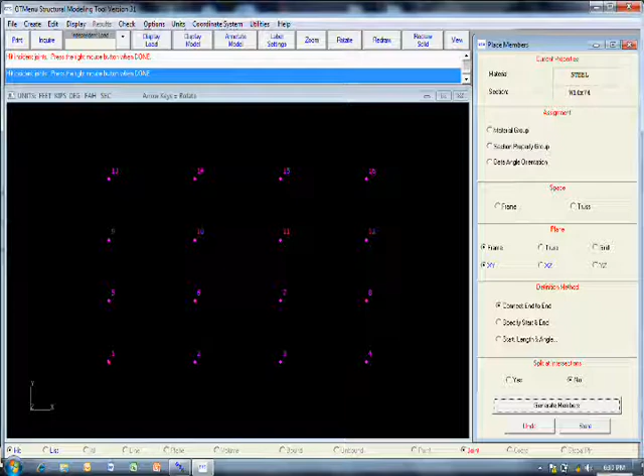All right, start off and click on Joint 1, and you'll have a line attached to your cursor. Click on Joint 5, then Joint 9, then Joint 13, and just go up to the line. Then after you click on 13, right click. You'll have a yellow line.

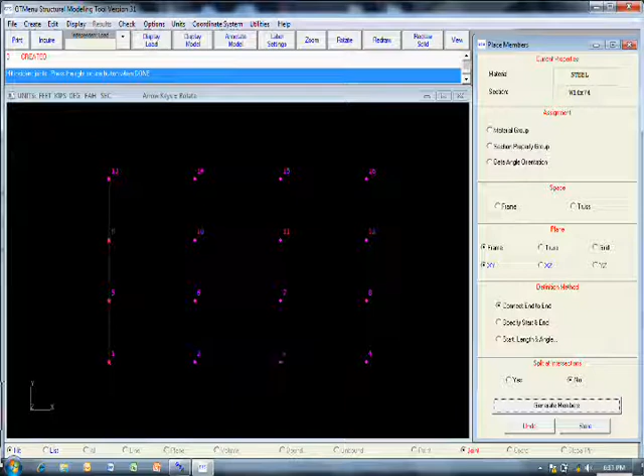Go back and hit Generate Members again, and do the same thing for 2, 6, 10, 14, right click. Same thing for 3, 7, 11, 15, right click. Then 4, 8, 12, 16, right click.

You always do columns? You can do whatever you want to. I just picked to do columns first.

So what I did is I just created 12 columns using W14 by 74s out of steel. You could put W14 by 74s out of concrete, but they don't make those, so make sure you got the right material property when you do this. Once you do that, go ahead and click on Store at the bottom right corner.

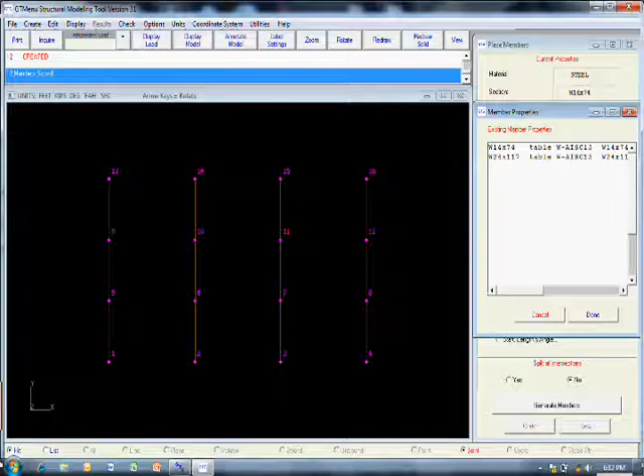All right, and then we need to place the beams. You're going to go back to the section property group up at the top right, click on the W24 by 117 and hit Done. Everything else should have stayed the same.

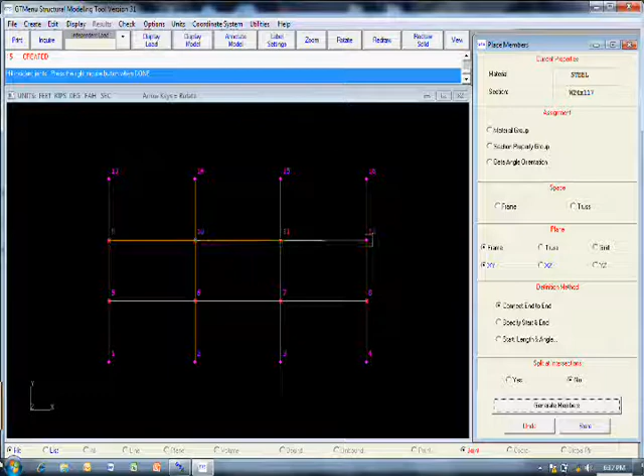You're going to generate members and start at 5. If I go too fast, tell me. Click on 5, 6, 7, 8, right click, generate members again, 9, 10, 11, 12, right click, generate members, 13, 14, 15, 16, right click, and then store.

All right, so we just created this frame in STRUDL. Now you have a maximum on your version of 50 nodes and I think 200 members, so make sure if you're ever doing a model that you don't make it too big. You get done with it and then it won't let you save it. For future reference, anybody doing senior design, I have 4 copies of the full version of STRUDL now for the department to use.

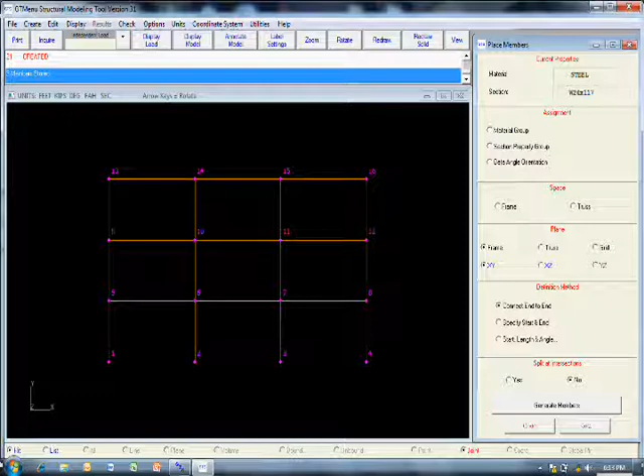All right, so now if you click on the View tab at the top, let's click on Isometric View. You get an isometric view of the frame, and click on Redraw Solid. All right, you can see the beams and everything.

Now this is a good way to make sure that you got your beams rotated in the right direction, from your columns and stuff. For example, instead of having square columns right here, we actually have wide flange sections that look like that, in this orientation.

Now, if I rotated those 90 degrees for my columns, is that going to affect how my frame behaves? Why? Because you're using the weak axis of the member to resist the moment. So when you're doing this, you want to make sure your columns are oriented correctly to be in strong axis bending in your lateral resisting frame.

Now there may be a situation though in the other direction, because we're not going to do it today, but at some place in this building, you've also got to account for wind blowing either this way or this way. So we got to put that in there too.

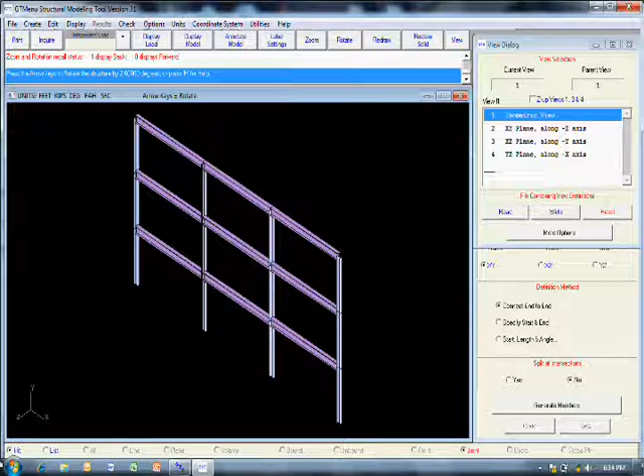But anyway, I just wanted you to see what the model looks like, and if for some reason you forget and left your units in inches, that would be a big blob of just members connected, because they would be huge with respect to the lengths. So it gives you another way to look and make sure you type everything in right. All right, so go back to XY plane here.

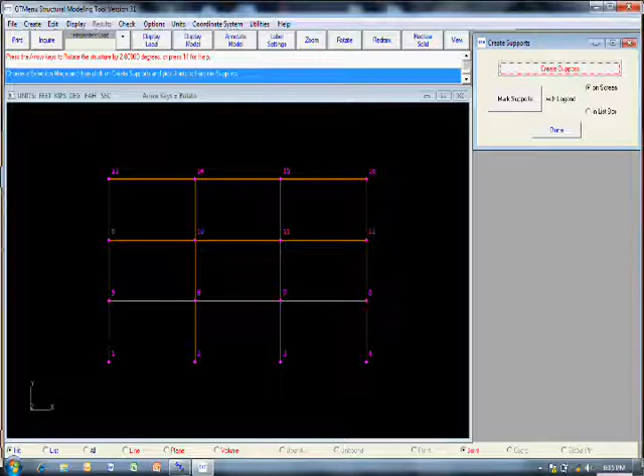All right, and this will be your frame. Now we need to add some supports to the bottom. So we're going to go to Create, and you're going to click on Support and Release, and then we're going to click on Create Supports in the top right corner, and you're going to click on joints 1, 2, 3, and 4, and then right click.

Now, the default in this program, and probably SAP or STAAD or anything else, is that when you click on them to make them a support, they're rigid in every direction. Rotation, displacement, everything. Okay, but we want to release the moment about the z-axis. So we want to allow these joints to rotate this way because it's extremely difficult to have a true fixed connection at the base of a building.

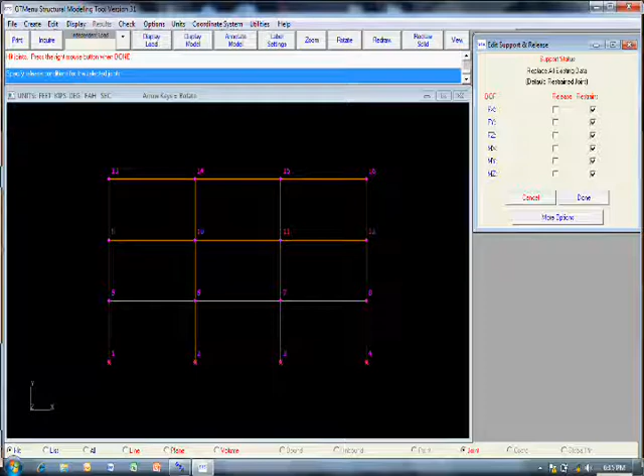All right, so we want to click on release MZ and then click done. And that gives us what you call boundary conditions for a model. Okay, so this is my model, but I need to save this before something happens. So go to File, and you'll see something that says Generate GT STRUDL Text Input. Click on that, and you should get this window that pops up. And click on Generate Input File at the bottom.

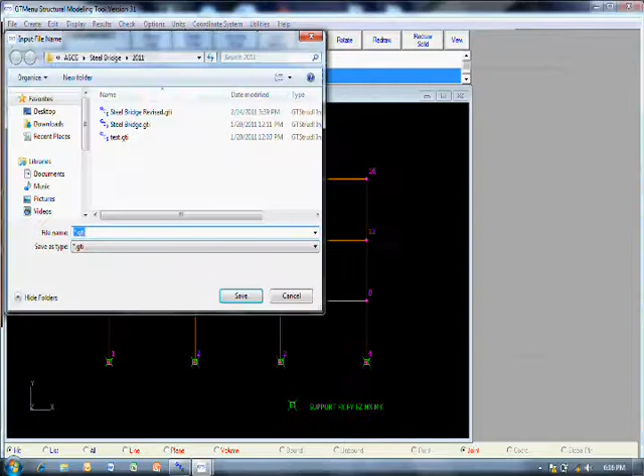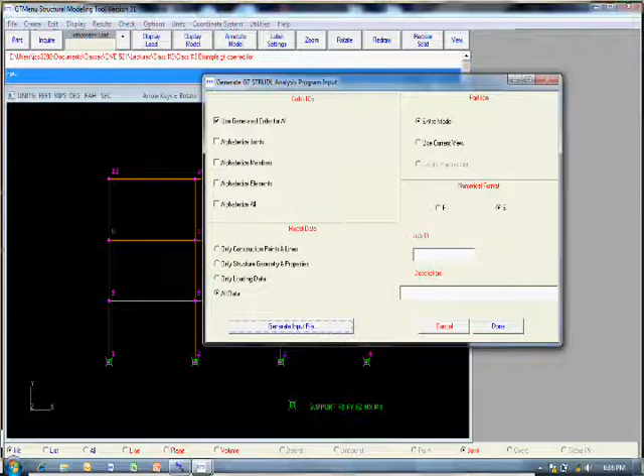And let's see here. All right, and you want to save that file. It should be .gti, and all it is is a text file. Okay, and then hit done. All right, so that saves all the geometry we just put in. Now we've got to apply our loadings.

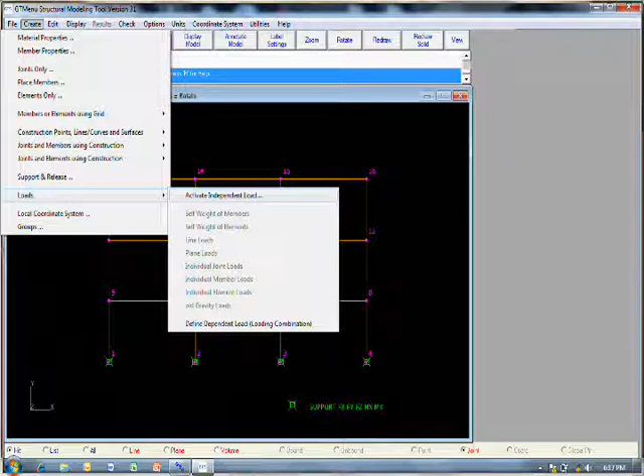So what we're going to do now is go to Create, Loads, and you'll see a drop down that says Activate Independent Load. Okay, and you want to click on that, and you'll get another dialog box. Now this is where you're going to put in your wind loads, your live loads, your dead loads, your snow loads. Right, and this is where they have to be in kips per foot.

All right, so to start off with, let's do the live load. So if we're at 40 PSF, we said our tributary width on that building is 10 feet for that frame, right? Okay, so that says that our live load is 0.4 kips per foot. So we're going to type in a capital L for the name, and then we're going to put live load under description. And I'm going to click Store New, and you'll see it pop up. Okay, now we want to go in and apply these loadings.

Now I want to read you something out of here. And if you didn't bring this, it's okay, but try to start bringing it in the future. I want to read you something in the live load section here. If you look on page 13, and this goes into the influence lines and stuff we talked about last week, on page 13, in section 4.3.3, it's got a section that says partial load.

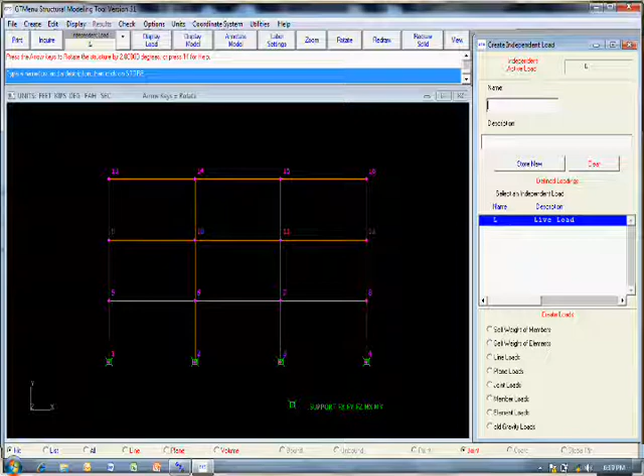It says the full intensity of the appropriately reduced live load applied only to a portion of the structure or member shall be accounted for if it produces a more unfavorable load effect than the same intensity applied over the full structure or member. So what does that mean? What did that just tell you? So for example, what's the worst case place to put the live load for this beam right here? Over the whole thing? Is it just over that beam? I think pattern live loads. Pattern live loads.